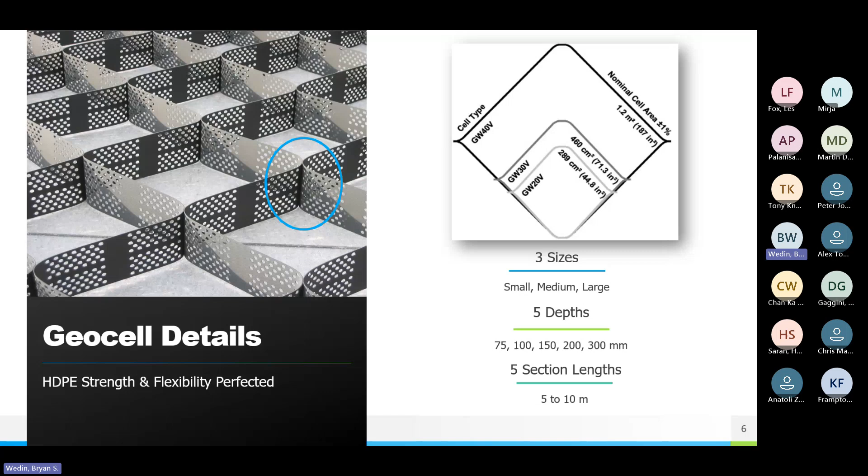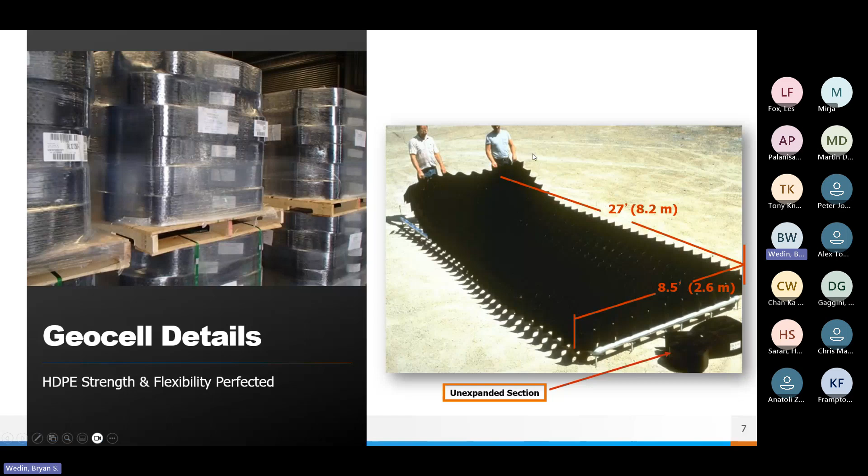Depending on the size and strength, it comes tri-folded on a pallet, ships very efficiently, usually anywhere from 12 to 20 sections on a pallet. Each panel has an area of about 230 square feet, so about 21 square meters. A nominal width of 2.6 meters for all our panels, and variable section lengths, anywhere from 5 to 10 meters in length.

The second characteristic is how you fill it. Geocells are very versatile in what we can fill them with. Under rail applications, usually we're going to use a ballast rock, anything less than about 1.5 inches in diameter can be filled. But a lot of rail projects we do in the UK actually use coarse sand. I'll show you some case studies where our infill was just 100% sand. With good aggregates being harder to find no matter where we do projects around the world, sand is usually locally available and less expensive.

When we do slope projects, hopefully I'll have time to talk about that today. We can fill it with topsoil, aggregates, or concrete. So it really is a very efficient system.

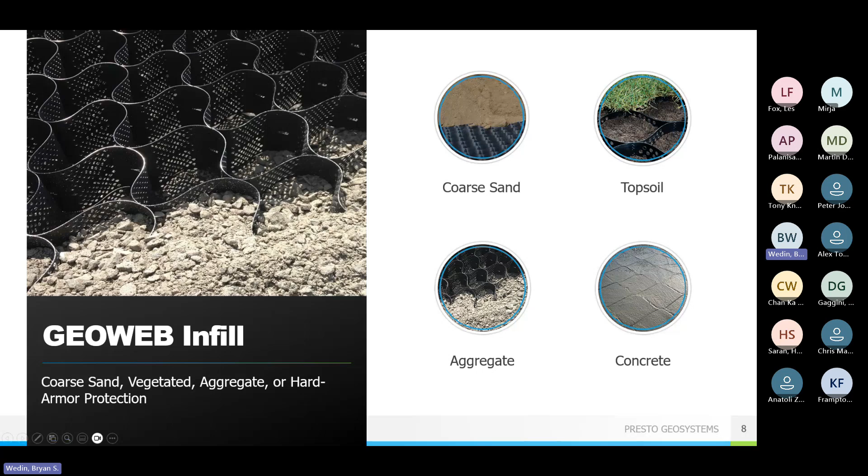The purpose is really just to stabilize and prevent the movement of unstable soils, whether vertically or horizontally. Today I'm focusing on load support, but we do a lot of slope protection for rail, up to about 70 degrees. You can fill it with topsoil, aggregate, or even concrete. We also do a lot of channel protection, and retaining walls — a lot of abutment walls against track all over the world.

So here's how 3D confinement works. Basically you have a vertical cyclical load, whether that's a tire or a train wheel on a track, putting vertical stress down into the subgrade. What we want to do is convert that vertical load to a horizontal load. You've got the active earth pressure inside of the cell pushing out, and the passive earth pressure in the adjacent cell pushing back. So really you only need one or two cells to support that load.

What it does is spread out that load distribution — I'll show you on the next slide. As this vertical load is turned into more of a horizontal load, it engages the hoop stress on the cells, which really does support that load.

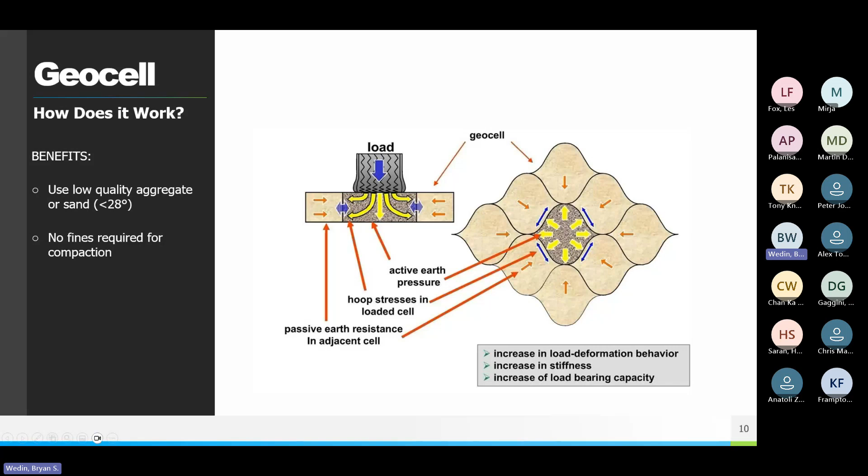This slide shows the amount of stress reduction we can get. A typical load distribution is a 45-degree angle as the load dissipates into the subgrade — you can see the high stresses in red, orange, and yellow. With geocell, stress reduction really reduces all of these high stresses, spreading the load out to 60+ degrees — we call that the mattress effect. By converting vertical load to horizontal load, you widen that stress chart out. As a rule of thumb, in a load support application, whether rail or roadway, we reduce the stress reaching the subgrade by at least 50%. It's a pretty significant stress reduction.

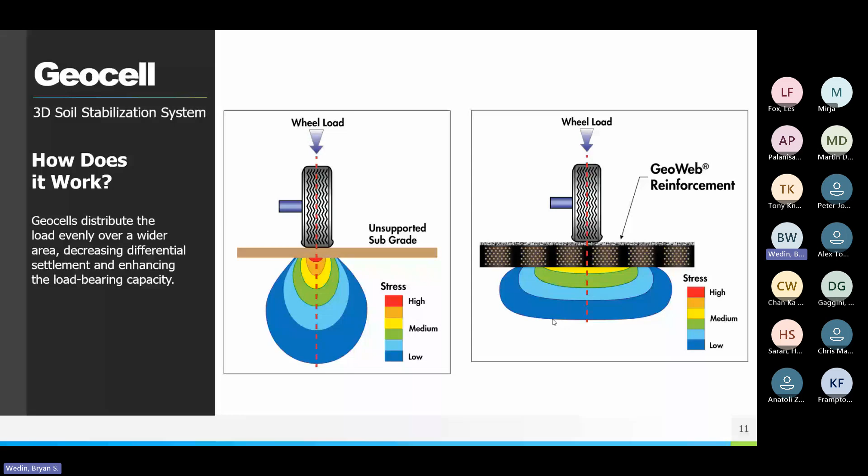We do a specific calculation, site-specific for all of our projects, and we provide charts that show the stress reduction given throughout the cross section.

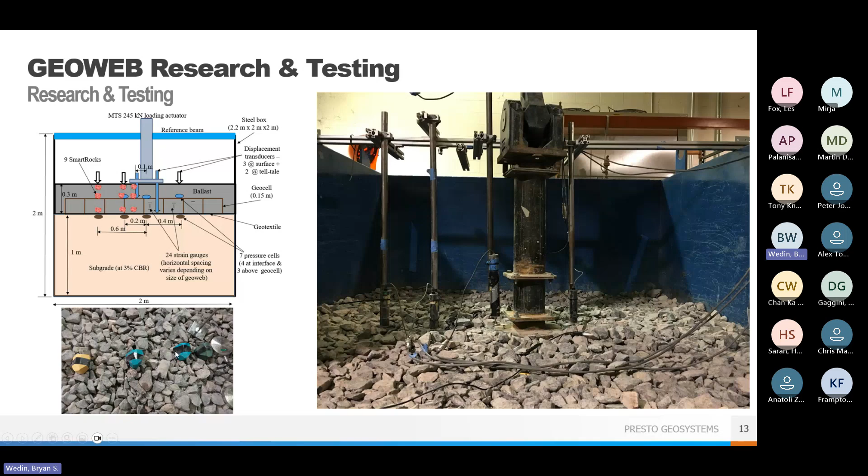I'd like to go over some recent research we did on geocells. We've been producing and selling them for over 40 years, and there have been hundreds and hundreds of research papers done. We've probably done at least 50 tests on GeoWeb — this one was basically under track. We wanted to take advantage of recent FEM, finite element models, for high stress, and we also wanted to use smart rocks — basic vibration sensors that detect how the ballast moves underneath a cyclical load.

We conducted the research here in the States. Jie Han, if anybody has done any unpaved roads or been to any conferences, is a very well-respected technical expert — they created the Giroud-Han unpaved road calculation, so I'm sure a lot of people know of them. Ben Leshchinsky did his PhD thesis on geocells at Oregon State, and Hai Huang from Penn State University provided the smart rock sensors.

Sorry, my laptop just got locked up here. Sorry about that.

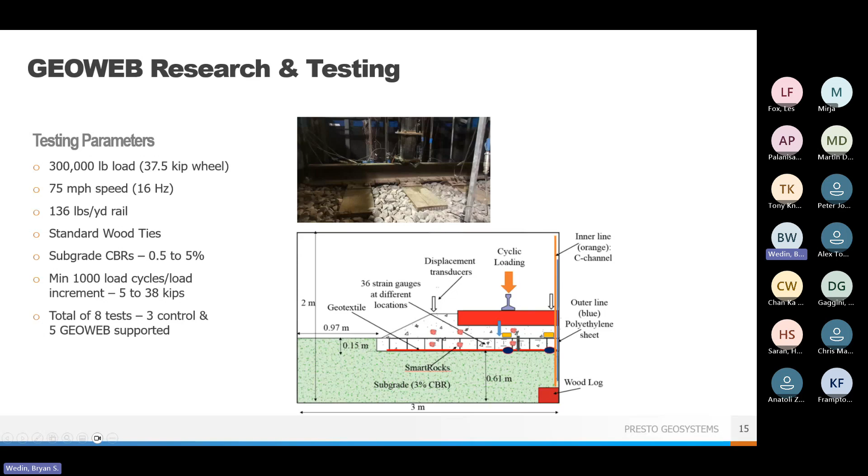We added these smart rock sensors into the GeoWeb. We wanted to see how the stress affects the movement of the rock, whether that's rotationally or in the XY plane. We put it in the GeoWeb, but also halfway between the top of the cell and the bottom of the tie.

A lot of Class 1 railroads and even railroads around the world have used geocells, and they understand how the addition of geocells to support ballast really reduces attrition in the breaking down of particles. It eliminates a lot of maintenance and less tamping.

So one of the main points of this study was to determine what happens when you add a geocell to the ballast. Here you can see how the smart rocks measure it - this one is measuring the ballast rotation, which was one of the points of adding the smart rocks.

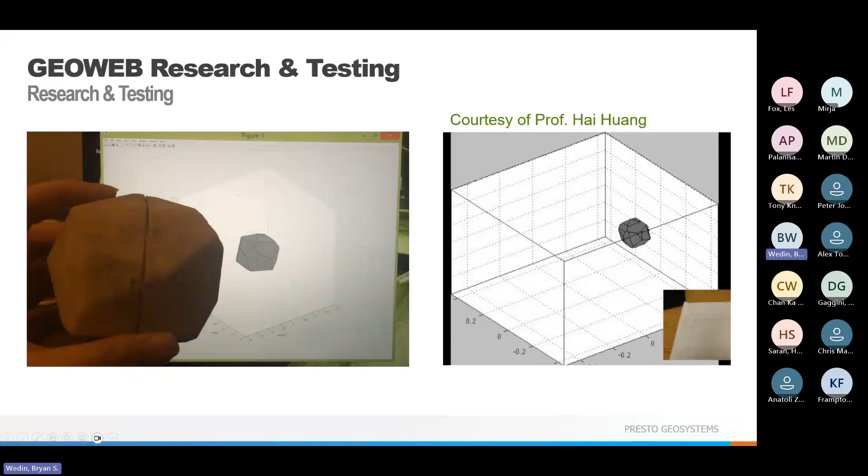The other measurement is basically how it moves around. As each cyclical load is applied, we want to measure how that ballast particle is moving, whether it's rotating and how it's moving back and forth. This one shows the angular velocity, measured by the rotation - how that ballast particle actually rotates.

Here you can see the control section. This is the most important one, because in the geocell it is confined, so it really isn't going to move that much. But this is below the tie - this was a 10-inch ballast, so 5 inches below the tie and 5 inches above the top of the geocell.

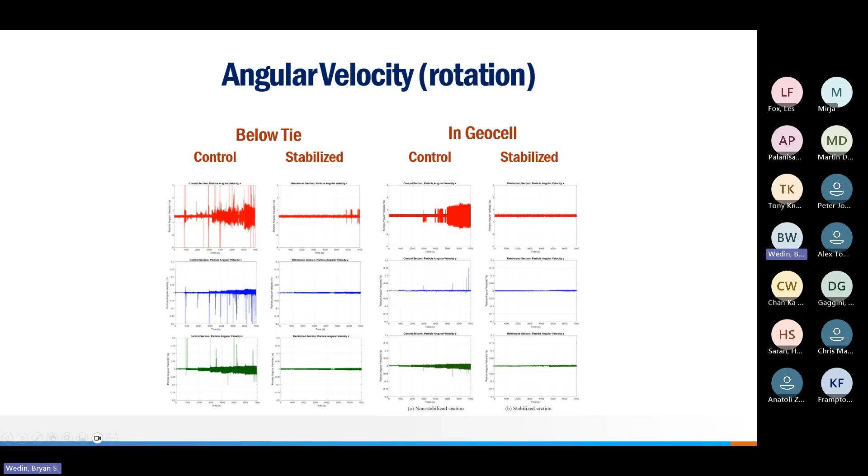Here you can see without any geocell confinement, a significant amount of ballast rotation. But with the geocell, you can see it almost completely eliminates any kind of rotation of that ballast. So you can imagine eliminating that rotation is going to limit the amount of ballast attrition and any kind of tamping.

Here's the second one - we're looking at how it moves back and forth, and once again, in the geocell it's pretty stable. Below the tie again, 5 inches below the bottom of the tie and 5 inches above the cell, you can see the control section has significant movement of that ballast particle, but with the geocell stabilizing it, it almost eliminates any type of movement.

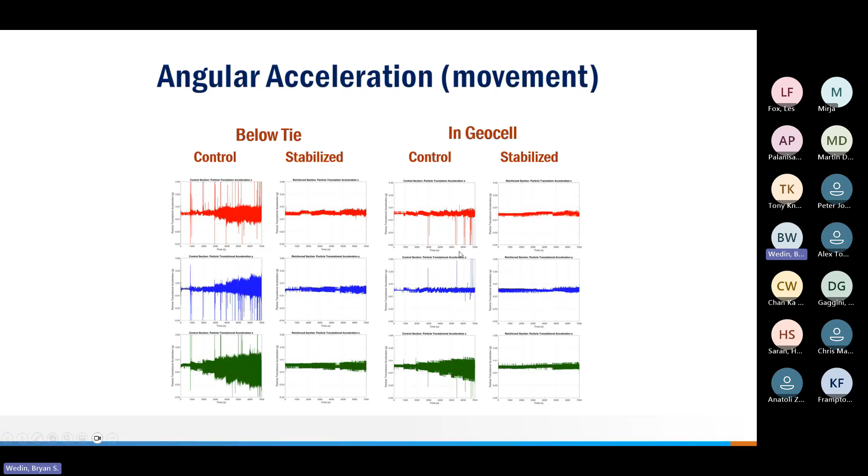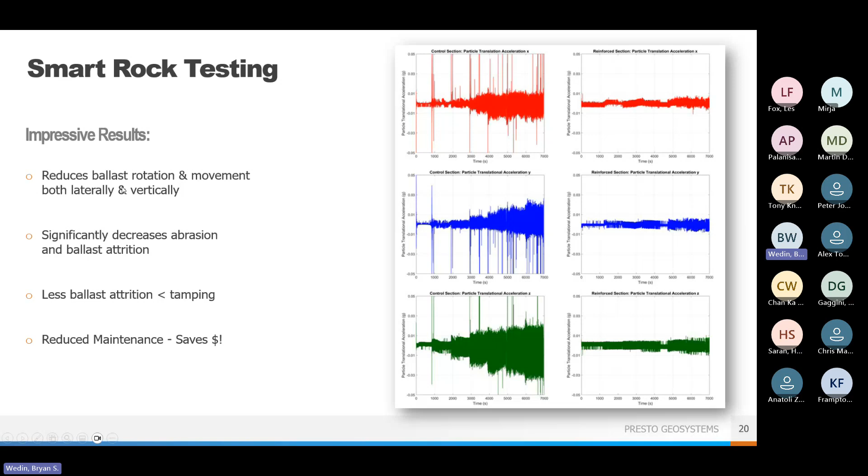It's a pretty significant study we did to show how and why geocells really limit the amount of maintenance required, by reducing ballast rotation and movement. So less attrition means less tamping, saving costs and delaying your maintenance cycles. We also looked at the finite element analysis.

It's proved something we've known for a long time - that we can really decrease the subgrade pressure by at least 50%. We can actually tell you site-specifically what your pressure will be on your subgrade. By reducing that pressure reaching the subgrade, we're also going to control consolidation settlement.

Another thing is differential settlement. If you're putting in a new track, the worst thing that can happen in any type of installation is differential settlement, so you're going to have a lot of bumps in the track. By using the geocell, it really does almost eliminate any kind of differential settlement due to the spreading out of that load - it can control and reduce that kind of settlement.

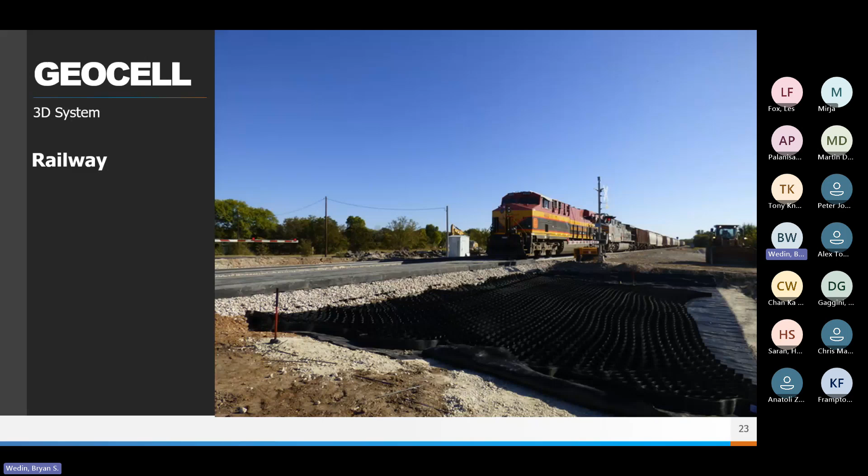Now we're going to talk about some geocell installations on track. Pretty much anywhere you have track, we can add geocells. The biggest advantage really is going to be on some of those high stress areas, whether it's straight track, frogs, turnouts, crossings, bridge abutments, things like that. But we've installed it under track all over the world.

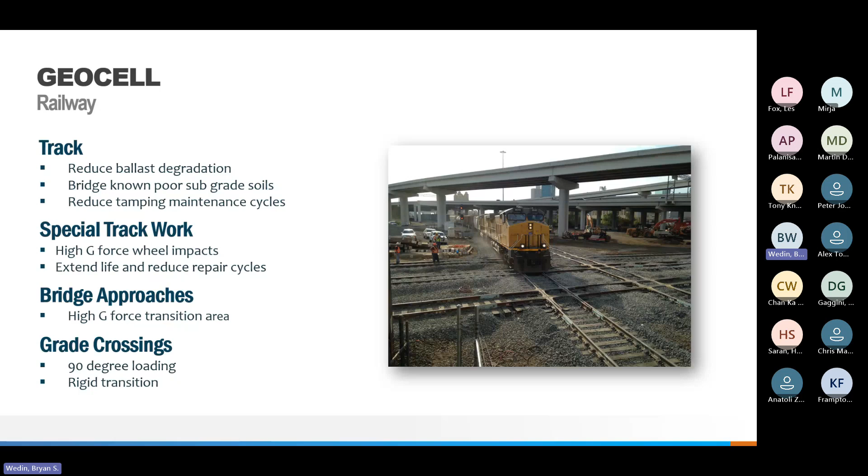We have hundreds and hundreds of case studies and a great website that I'll touch on a little bit later. This is the one that Roy mentioned - this was for British Rail, a couple kilometer section. British Rail had issues with this one because it was in some really bad peat bog areas.

This installation was carried out on the Edinburgh to London line. The area was called Newham Bog, where peat layers reached up to about 5 meters - some pretty bad soils. The primary challenge here was the ground settlement, caused by really bad soil conditions, leading to a lot of track maintenance.

They actually had to reduce the speed from 200 kilometers down to about 70. So you can imagine that increased reduction in speed led to increased travel times and energy consumption. So British Rail really had to do something here.

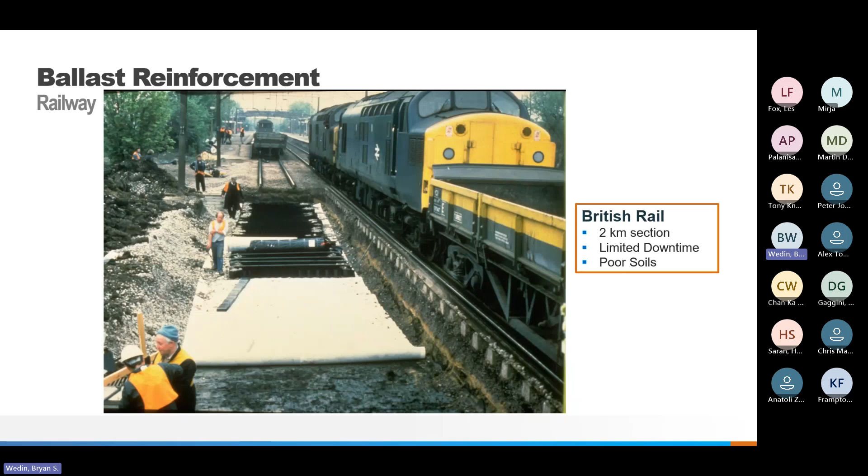The biggest problem here is the downtime. They had to really limit the downtime, and their typical approach of excavating and filling in with rock was not an option. So they came to us and gave us a deadline and time frame to limit those service disruptions.

So here you can see this installation was pretty noteworthy because we did this in two sections. The northbound section was completed first. What they did was expand the sections across, and then they just left the unexpanded sections done, unexpanded, so they could come back. Here you can see they installed actually two layers of geocells.

They were 200 millimeter geocells. Here we installed a drainage geocomposite to enhance drainage across that section.

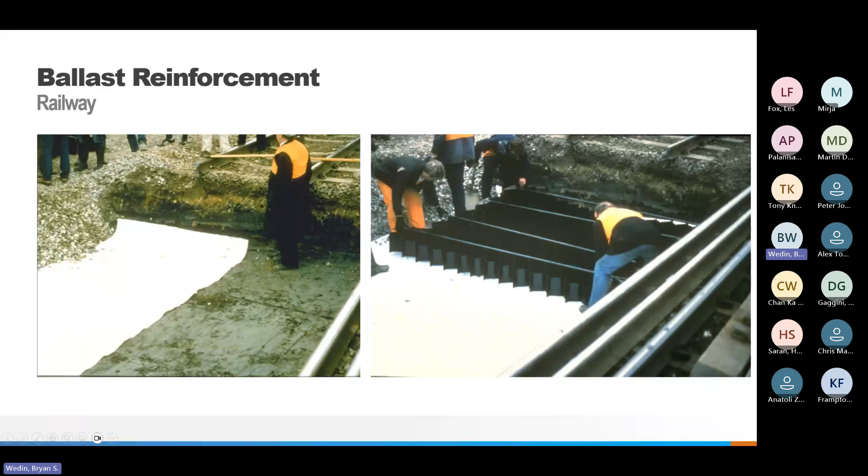This one was so old, I don't know how good the screen is, but this was actually before we added perforations to the geocell. This was one of our original inventions that didn't have any perforations. We added the perforations a couple of years later to increase drainage, but also to increase frictional interlock of the infill material.

Here you can see a better close-up photo of the geocell and the drainage geocomposite in the concrete sleepers and the rail. Here you can see the geocell was filled with crushed aggregate. We really minimized the fines to about 10% to enhance that drainage performance.

Rule of thumb, if you want drainage or enhanced drainage, you want to keep the fines to 10 or 12% or less. It really provides a lot of drainage.

So after we did this improvement, it really did improve the stiffness of the track. Within a couple of weeks of both sides being completed, they were able to restore the speeds from 70 kilometers per hour back up to the target speed of 200 kilometers per hour. So a very efficient installation.

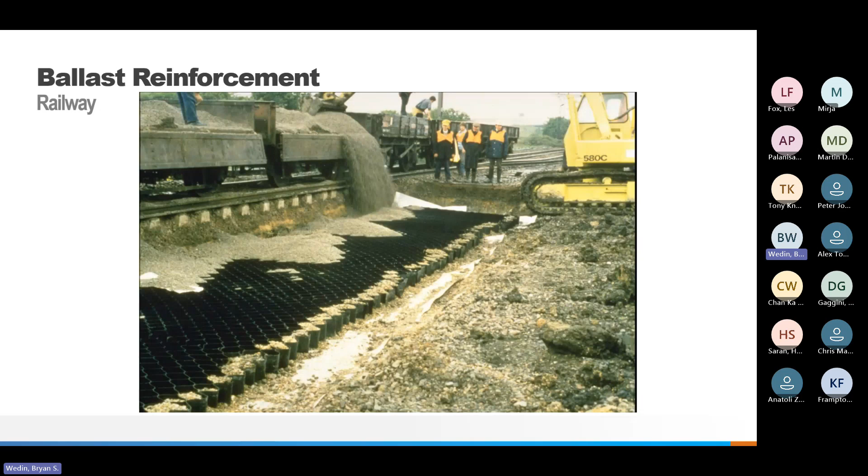Now it's going on almost 30 years, so it's been under the track for a long time. And here you can just see the final track.

This is a project we did for Network Rail. This was a project on our northern hub, called the Bolton Euxton line. Parts of the track here were enhanced on the northern hub, located on some really soft ground, low shear strengths, with CBRs around 1 to 2%.

As a result of that, the standard track depth that was going to be required was as high as 1 meter. Network Rail realized that was basically too expensive to construct. So they contacted us — we've done a lot of work with them.

We worked with their track bed investigation team. They were tasked with finding an alternative design solution. So we worked with them and developed some numerical modeling and also a design method using the way we design track here in the States, the AREMA method.

That's how we design tracks here in the States. I use that method for rail designs all over the world. The one thing I'll show you in a little bit, Roy mentioned about the Network Rail design method that was sent out.

On this project, the model we used, through some testing, looked at different geocell layer thicknesses and different geotextiles compared to their standard track design. The iteration showed that a track bed design consisting of a 250 millimeter ballast layer, 150 millimeter deep geocells filled with granular fill, and about 50 millimeters of sand would provide basically similar performance to a standard design solution from Network Rail, but saved about 100 millimeters of construction depth.

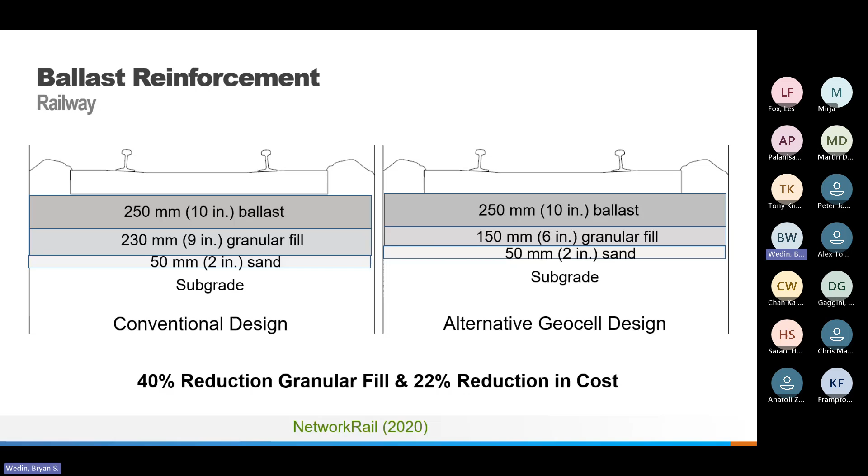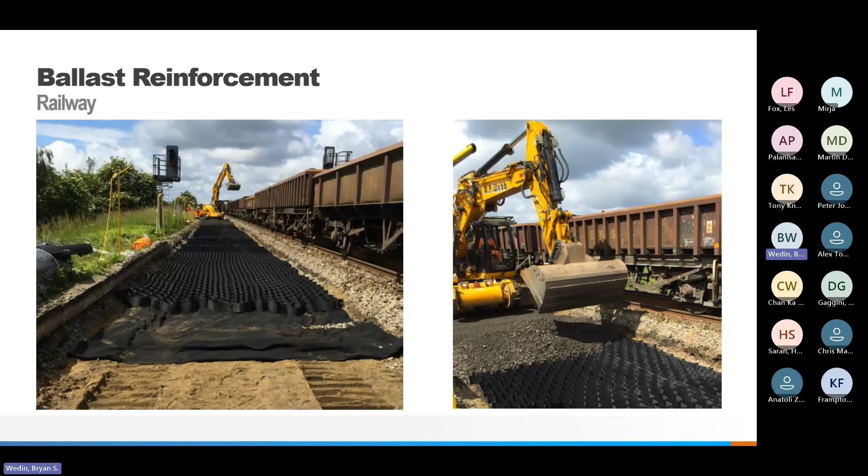Here you can just see a couple of images of the installation. Here a non-woven geotextile was put down, placed with a 50 millimeter sand layer. Once again, that 150 millimeter deep geocell panels were put down, filled with crushed aggregate on this project.

They have been doing routine monitoring of this site since the early 1990s, basically starting in January of 1994.

This line opened in 2018 with the new geocell installation. You can see here the slide shows the track quality of that mile, the worst 35, I mean the standard deviation. You can see it significantly increased and reduced the degradation of that track ballast.

You can see here their first method when they came in and did some reconstruction - this was over excavation and filling in. In 2002, you can see a direct line with how the track performance degraded. They did some stiffening of the ballast back in 2010, and you can see initially a drop, but then right away it got back.

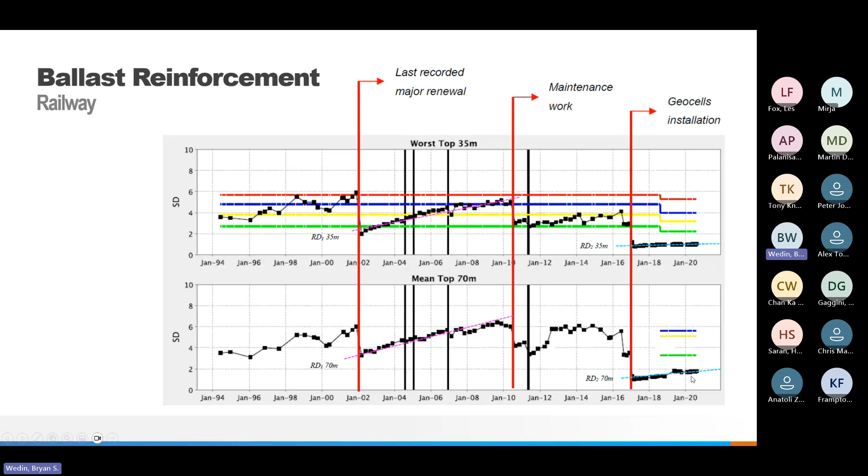When they put in the geocells in '18, you can see very, very low maintenance was required, hardly any degradation over the last 3 to 4 years. So it's been a very successful installation.

Here you can just see a comparison between the track quality in 2002, and after the first installation in late 2017. After the installation in 2017, you can see that track quality and deterioration improved significantly. The deterioration rate after renewal in 2002 ranged to about 0.9 millimeters per year over those 10 to 12 years. After we installed the geocell, those values went from 0.9 millimeters per year down to 0.1 millimeters per year - a significant reduction in the degradation of that ballast.

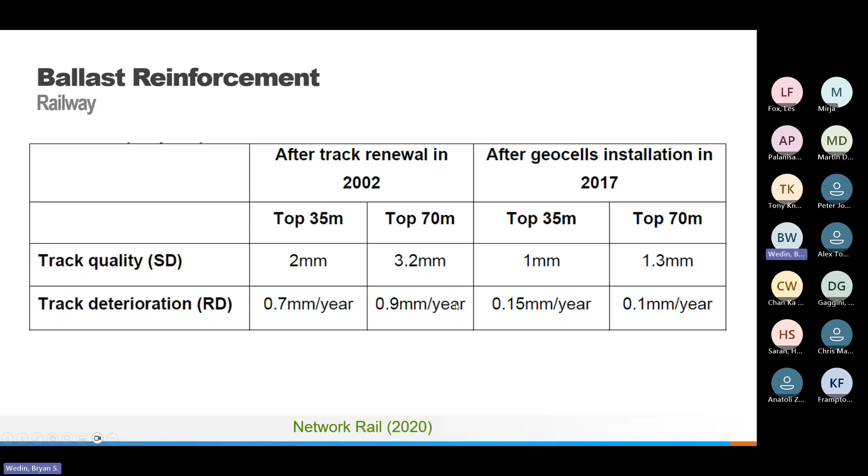Roy had mentioned this before - based on this project and the research and testing we did, and some other projects with Network Rail, they were very interested in expanding the use of geocells under track. So I worked with Network Rail, and they used a lot of our research, specifically the research I talked about with the University of Kansas and Oregon State, to develop this geocell standard. It's available on their website - the use of geocells in the track bed for Network Rail. It was peer reviewed by 6 world-recognized rail professionals all around the world, so it's a very good design guide to use.

So you can use it to develop geocell cross-sections in your designs. Once again, I would highly recommend reaching out to us, and we can help provide a more in-depth evaluation for your track, looking at different factors that lead to deterioration, which I'll show towards the end of the slides. So here's another project.

This was for Werrington, just north of the Peterborough rail station, about 3 miles. The aim of this project was really to increase capacity for passenger trains. This was part of almost a $1 billion upgrade, called the Werrington grade separation project, which built two new track rail lines under tunnels for the existing line. It opened a couple of years ago, and it really did remove the constraints for the timetable caused by slower freight trains that were on that route and had to cross over the line.

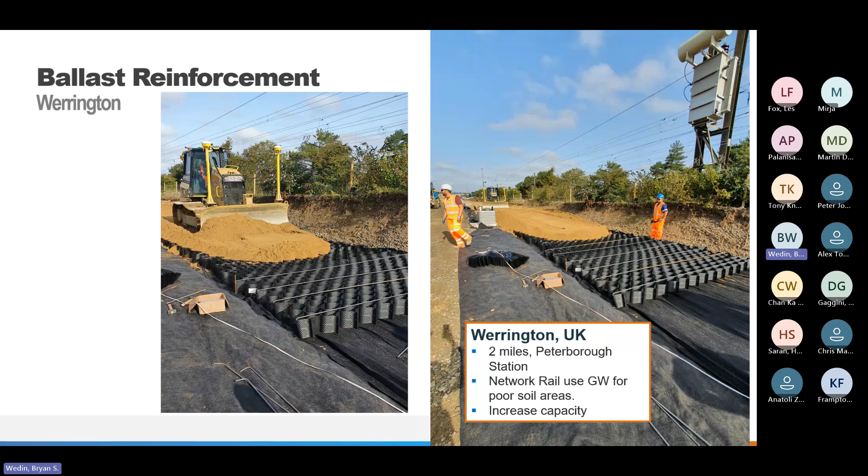So even in Europe now, I know in the States, Australia, South America, they've eliminated any use of slit tape woven geotextiles underneath tracks because of the poor drainage capabilities. So just something to be aware of if you're doing any kind of design - you don't want those geotextiles. But here you can see what I was talking about with that coarse sand.

Aggregates were a little bit more expensive in this area, but they had a ton of coarse sand. So here you can see that we actually use coarse sand to fill the geocell panels. It's really flexible. We can use those low quality sands. We don't need the high friction angle aggregates, like say a geogrid or geotextile, because that geocell really does provide the confinement.

This contractor was very consistent with how we wanted these panels to be expanded. So we actually went out and bought and built these rebar stretcher frames to make sure that track was aligned really straight along that whole couple-mile route.

So you can see installation is very fast, filling it from a side loader on an adjacent track. It goes very fast, especially, this was taken right from the site over in Werrington. As you can see, once they're putting down the fill, typically a dozer with GPS on it just comes and pushes the fill into the cells.

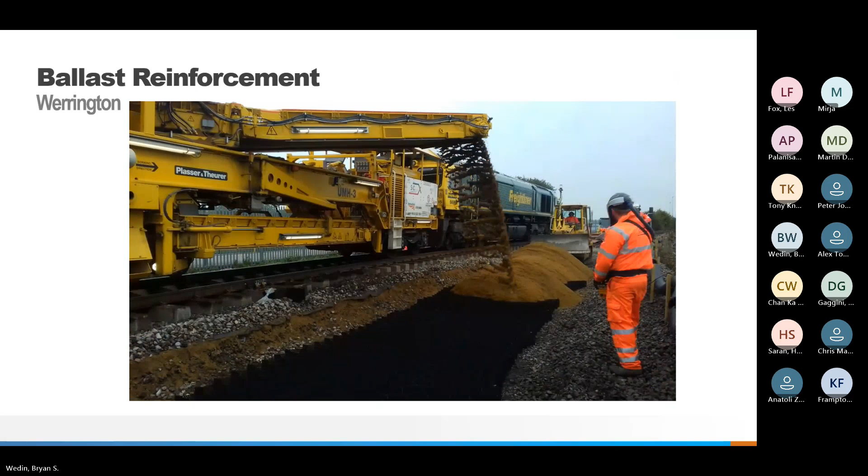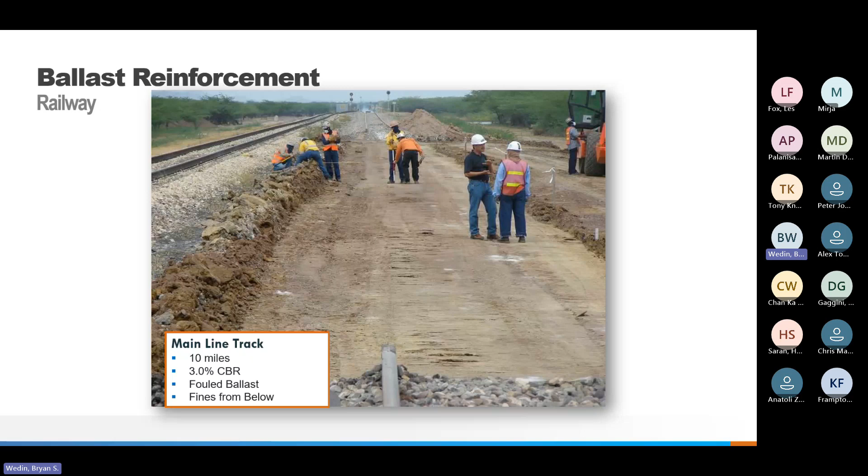Subgrade wasn't too bad, it was about a 2 to 3% CBR. But they had some drainage issues, you can imagine, with all the fines clogging that track bed.

So on this project, the interesting thing is we actually scraped the ballast layer, and it was contaminated. We stockpiled it along the whole site. This was about 10 miles in length.

Here you can see it's 2 panels of GeoWeb, so about a little over 5 meters in width, with an enhanced woven geotextile separator. But like I said, with GeoWeb we can use that coarse sand, just wanting to keep the fines to about 15% or less, which we tested a lot of this ballast for.

So we just stockpiled it and they put it right back into the geocell. This was 150 millimeter GeoWeb depth. Reusing that fouled ballast material saved them from excavating it out, hauling it out, and bringing back fresh ballast - saved over 12,000 cubic meters of material.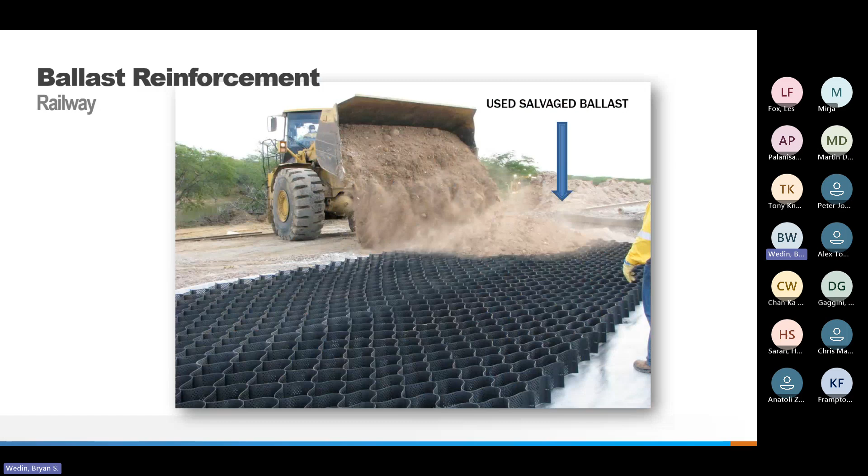So you can imagine the cost savings to the owner, not only in the infill but in hauling costs. Another thing they were sensitive about was carbon emissions. So without having to produce that ballast, haul it, and place it, they saved a lot of carbon emissions. That was really important to the owner too.

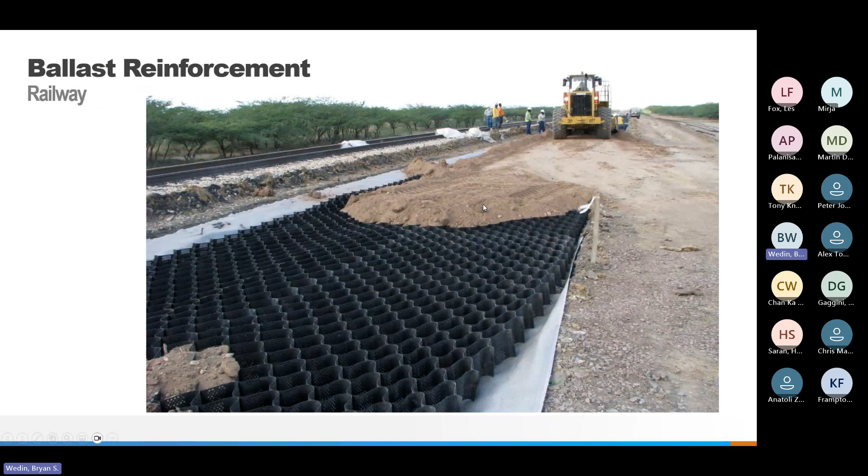Here you can see that salvage ballast being put in. If you look closely, maybe some bigger rocks, they would just go through and basically handpick those out. Here's the finished line, 10 miles, about 12,000 cubic meters. So if you have a rail project, we sometimes can use fouled ballast as the infill material. We would work with you to determine if that's feasible.

Here's one we did. This was in Canada - really, really, really poor subgrade soils. I like to show this one because you can see here a complete degradation of the ballast, all the fines pumped up, and they basically started to lose the ballast into the subgrade.

This is just like that British rail project. You're looking at 5 meters of peat. In Canada it's called muskeg - basically a peat bog.

This one was about 5 miles that we had to repair. This is way up in northern Canada, so there's not very good access to get up there - it's very hard to get up there. We've done a lot of work with the Canadian Rail, Canadian National, Canadian Pacific Rail, so they brought us in to develop a cross section for them.

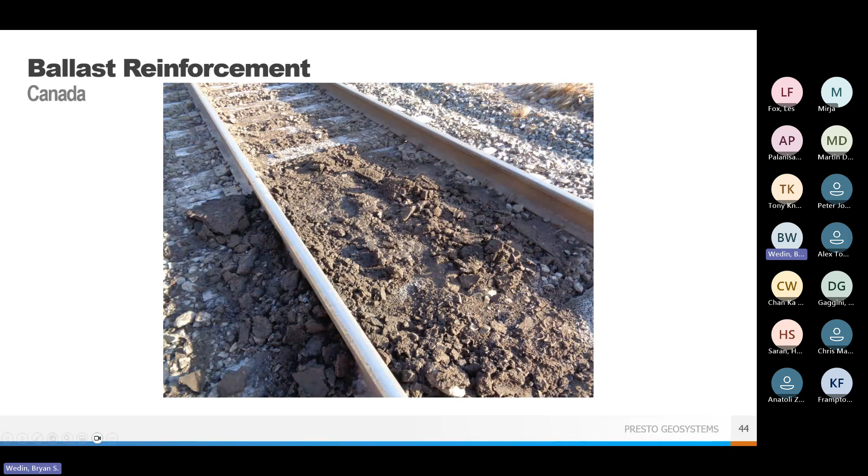Once again, you can see all the pumping of that ballast. And when the trains would go over, I've got a video here - you can see how that track actually depresses and comes back, the squishing and pumping of that ballast. So take a look at this.

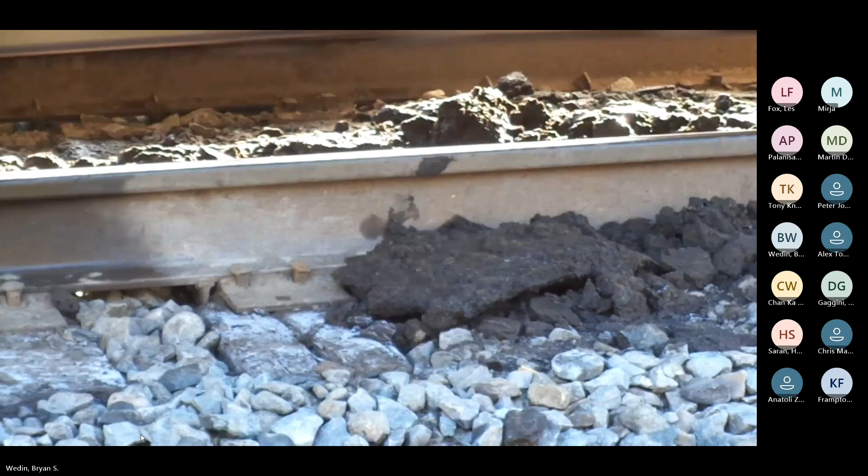So that's the kind of thing you can imagine - every time that train went over, we were able to get really close to the track. As you can imagine, they don't want anybody near the track to take video that close, but to document how bad it was actually moving, they let us get close. Those sleepers were moving, sometimes up to 6 to 7 or 8 inches every time a train went over, and they were extremely worried about the train coming off the tracks, a derailment. So this was really a rush project for them.

Since the subgrade was so poor, we used enhanced woven geotextiles, like I said. It really does allow drainage. Something a lot of engineers aren't aware of is that with a lot of geotextiles on these low subgrade strengths, you've got to overlap them.

Overlapping is pretty consistent for low subgrade soils. Usually there's a guide - there's a European guide, and here in America we use AASHTO, the highway method. It's pretty consistent all over the world, but if you have subgrade CBRs about 1%, this would require a 1 meter overlap. So if anyone's ever been out in the field trying to install a geotextile, if it's windy, it's almost like a kite - very hard to keep that overlap consistent, and really hard to actually install it when it's windy.

So the geotextile manufacturers offer factory seaming. If you have a CBR usually less than 1, it's recommended to factory seam them. On other projects too, you should be aware this is becoming pretty common now - they factory seam these in the factory, so there's no overlap needed. The cost to seam it in the factory is pretty insignificant, and you'll definitely save that in installation time. If you have any information about that, please reach out. I've installed hundreds and hundreds of miles of track with this factory seaming, so it's really something good to look at. And it doesn't have to be a track job - it can be a road job or any type of job.

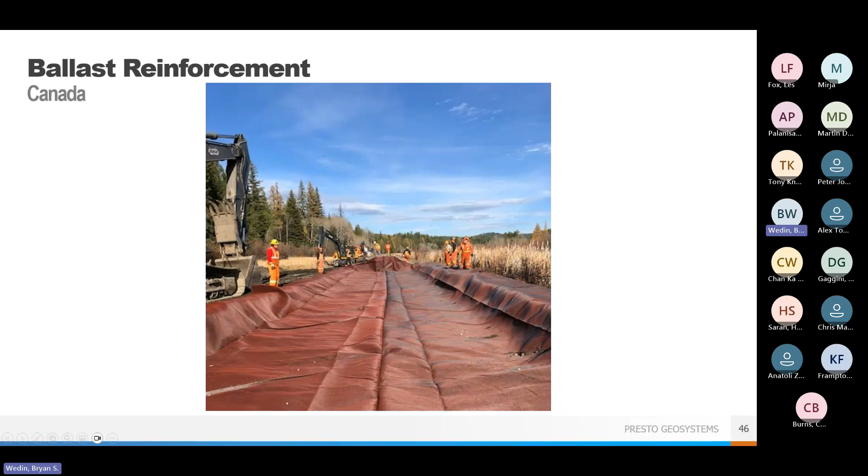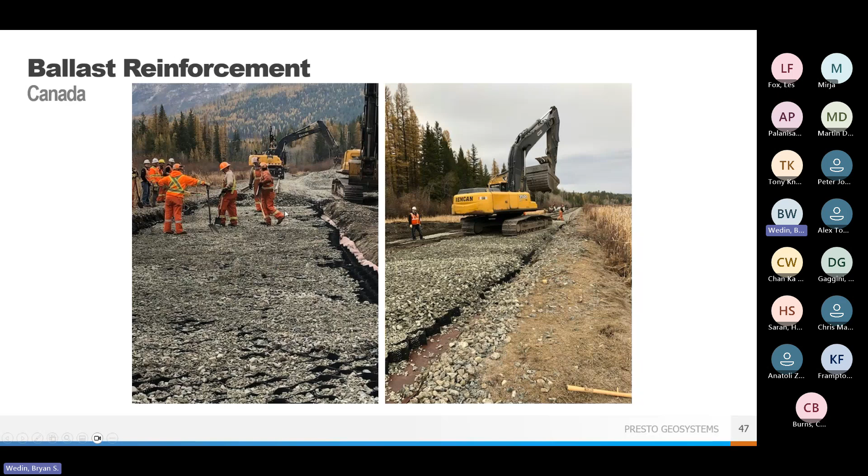Here you can just see a couple of pictures I took, filling in that ballast rock. Like I said, this was way up in northern Canada. Typically here you can see the track being excavated, the geotextile going down and coming up the side. This was filled in with an upgraded aggregate because they wanted really good drainage out the sides of the track layer. Once again, just filled to the top. They did have a compactor on this, but the vibration was really low.

And here you can just see the finished track going into service. Like I said, this is about 5 miles on that northern route.

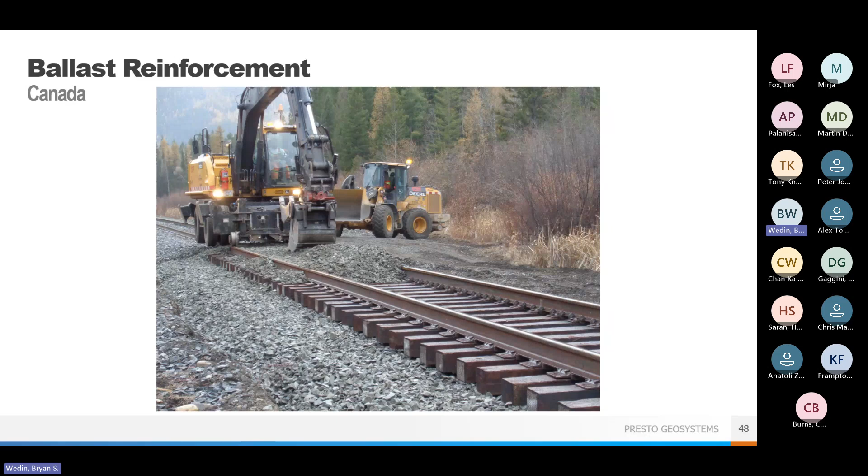We also do a lot of high stress areas - grade crossings, diamonds, frogs, turnouts - a couple of really interesting applications for rail. This is a typical crossing, actually a project we did in the States for one of the big Class 1 railroads. This was an existing crossing that had a lot of maintenance - basically standard concrete panels and wood ties. It's located next to a big concrete plant, so heavy trucks were coming to a stop and accelerating, really damaging that crossing as they went over the top of it. The system failed - the whole concrete panel and the ties failed due to the excessive braking and acceleration going on over it.

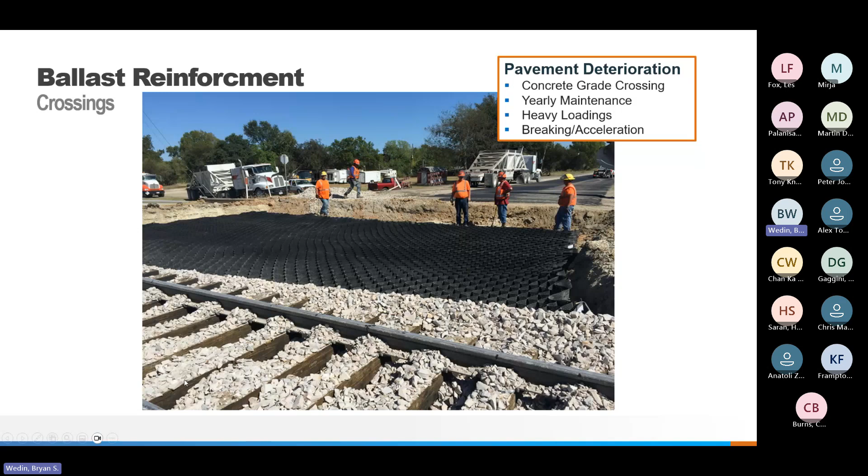So what they did is they tried to relate the panels together, actually tack welded to each other, to try to stop it from failing so much. That didn't work. So they came to us and we put in a standard crossing, going about 8 meters outside of the crossing on each side, to really dissipate that stress as you're coming on and going off it. We wanted to dissipate that stress before it gets to the crossing. This one was pretty interesting.

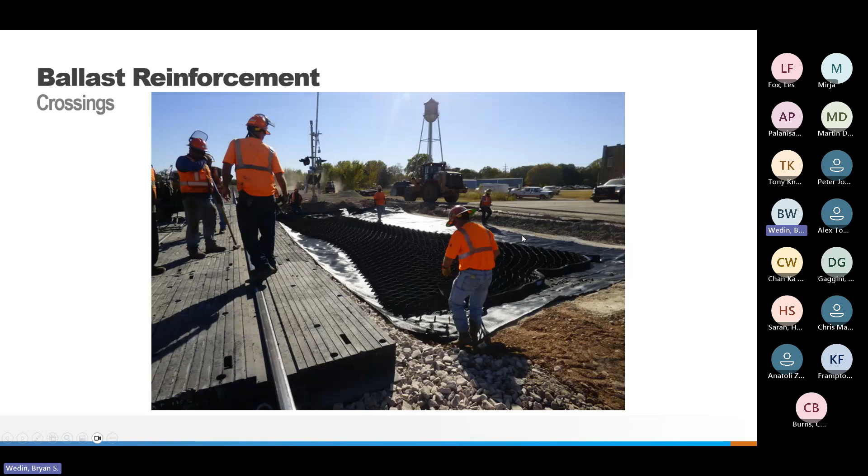This was the first installation of a composite grade crossing. So basically, this is recycled plastic with the steel rail. Here you can see the geo was used underneath the crossing too, and you can see the enhanced geotextile again, and that geoweb being expanded about 8 meters to the other side.

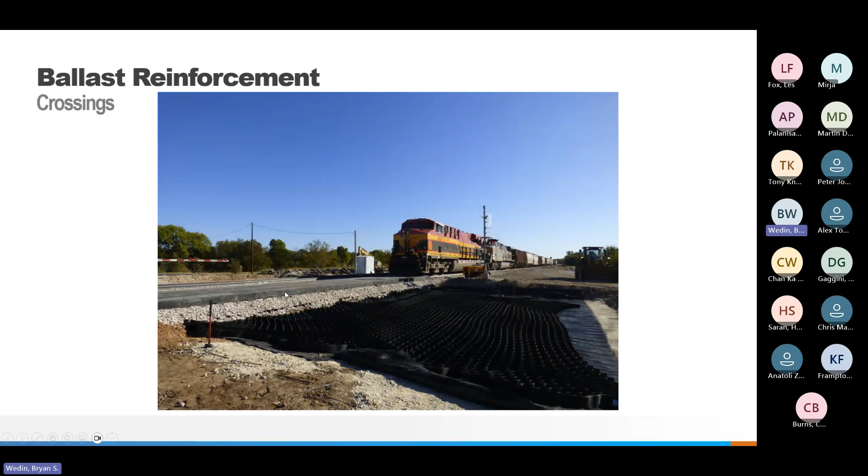And here you can see the first train running through the crossing even before the geo, and it was filled with aggregate. So you can see here underneath the crossing, you can see the geocell, and this one had 12-inch ballast. You can see the great composite grade crossing, a plastic grade crossing.

We do a lot of crossings at night. Geocells are really very quick to install. Most of these crossings might be 1,000 to 2,000 square feet. So a lot of times on Saturday night when the train volume is down and traffic is down, they'll go in, cut the tie or cut the rail, remove the ties, excavate out what they have on there, and once again we're going to stockpile that material and use it to put right back into the crossing.

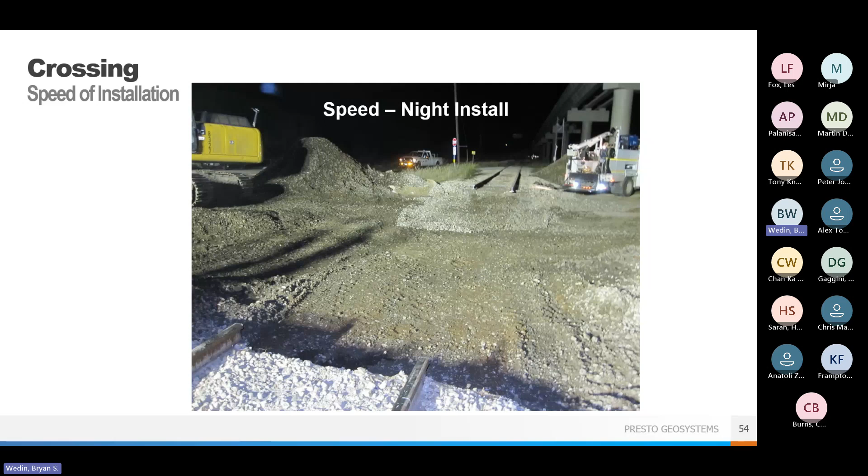Usually these are completed in about 4 to 6 hours. The good thing about it is a lot of times they're conducted by the rail staff itself. They don't have to bring in contractors, so they can really coordinate the traffic and coordinate their own crews to do the work. Like I said, usually Saturday nights, 4 to 6 hours, compared to like an asphalt crossing where the plant has to be open.

But here you can see once again, standard enhanced woven geotextile. This was a 6-inch, 150 millimeter geocell, and we're reusing that salvaged ballast that was removed and put right back in. This one actually was on, and we took these pictures. We started this about 11 o'clock, and they got done putting the rail back in about 4:30 in the morning.

This was the first one that crew did, so really not experienced at all with this track staff, and they did it in around 5 hours. Pretty successful installation. Here you can just see the ties and the rail being installed. So like I said, this is about less than 5 hours.

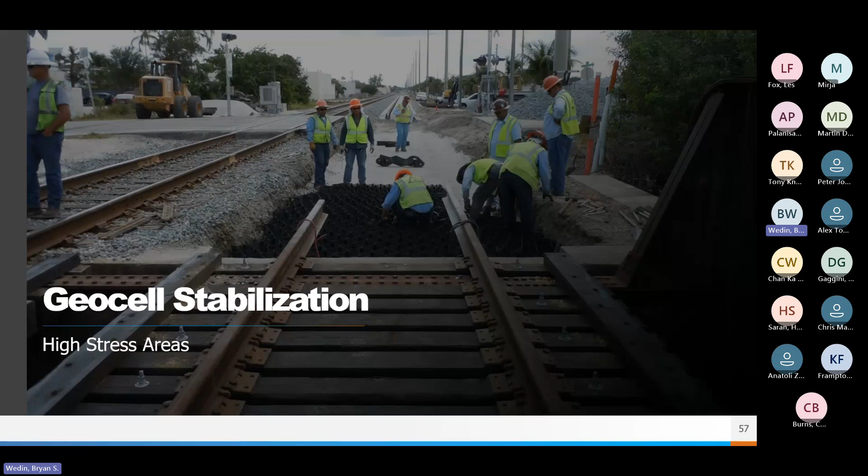We also do a lot of interesting applications. We do a lot of bridge abutments, high stress areas when you're coming off a concrete bridge, and you're dissipating that stress onto the compacted area. Over time, especially when it's a new bridge, depending on the amount of excavation, you're going to get consolidation settlement. That's just going to happen. No contractor could compact it enough where just the weight of the soil and the trains and the rail and the ties above it are going to have some consolidation settlement.

But we've been using this against bridge abutments for almost 30 years now. We've done a lot of work with Australian rail, South America, here in the States, not as much in Europe yet, but also in the UK. Here you can see this is a standard abutment. This one was about 15 feet high.

On this one, we used 2 sections of web, so about 5 meters in length. There is an enhanced woven geotextile under that. Just like the other ones, we want to expand that about 30 feet from the bridge. So here you can see the rail, we stopped the rail about 35 feet. So here's the length, and that basically dissipates that stress going onto the bridge and coming off the bridge.

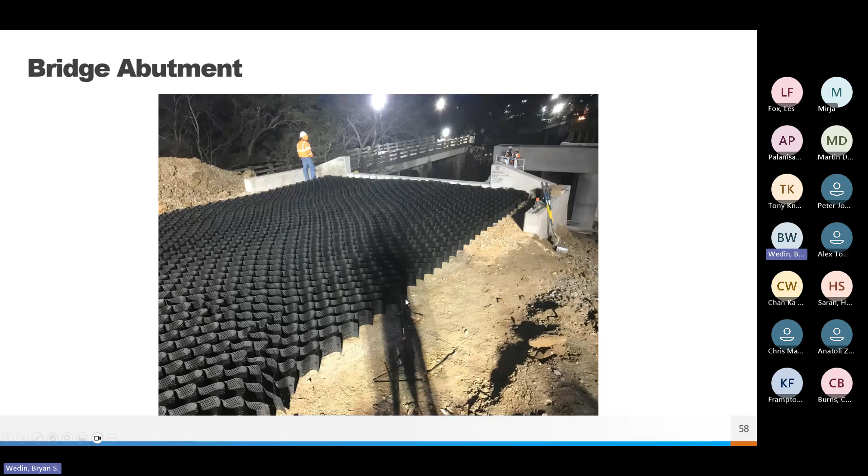Sometimes when we have very deep bridge abutments, I always say about maybe 8 meters, give or take, about 25 feet, a lot of times then we'll put 2 layers of geoweb here at the bridge itself, and then we transition to 1 layer. So this is usually 2 panels in length.

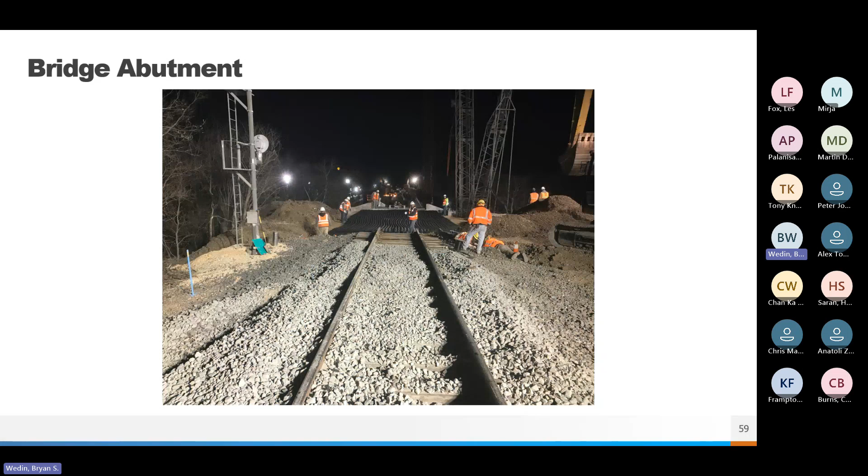So this first area will be double wide panels and 2 panels in depth, then transition to just 1 panel. Like I said, we would work with you, provide full evaluation, so you can see what type of stress reduction that you get at the abutment.

Here's just another project. We do a lot of culvert crossings. Of course, when you have these crossings, these bridges, culverts, you're going to have a significant amount of poor soils, usually wet, poor soils. So we use the GeoWeb here.

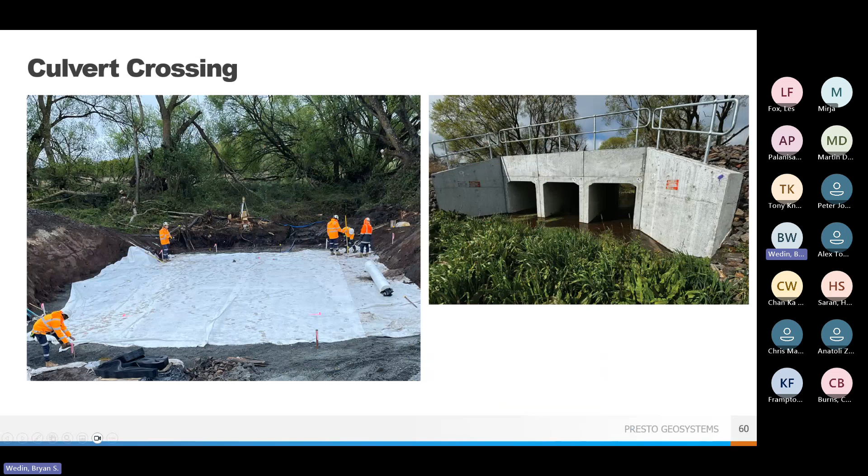Oh, this one is interesting because we actually used a fabric, and we also used... I'll show you the picture. So here we actually used an enhanced woven geotextile underneath the subgrade.

And we actually used a grid, a triaxial geogrid underneath. The rail wanted to ensure that there was absolutely zero settlement, so they wanted to add this geogrid in here too.

So you can see the textile, the geogrid, and the geocell being put down. This was 200 millimeters in depth, filled with the crushed rock. Once again, we limited the fines here, so there would be no issues with drainage on this project.

So in this one, compared to the engineer we worked with on this project, we were able to reduce the thickness of that base by over 50%. This base with the GeoWeb was about 300 millimeters. Without the GeoWeb and just a standard geotextile, they're going to require double that.

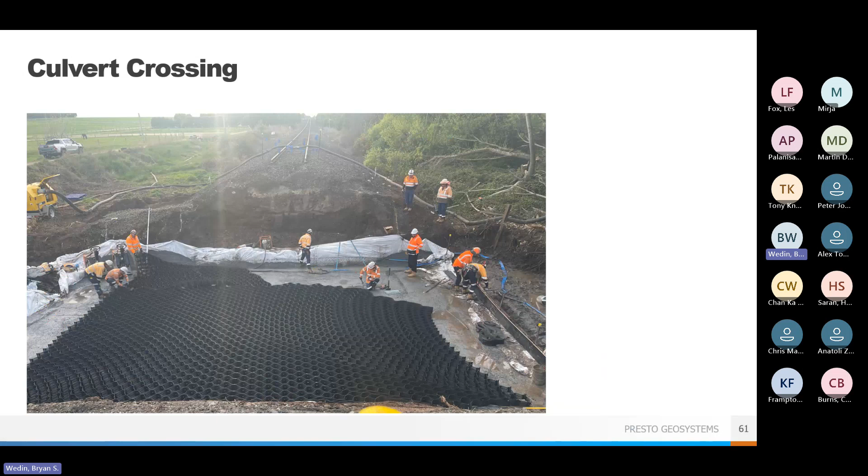So a significant reduction, and the downtime also of rerouting that creek. So now here you can just see the finished project.

Also scales. Scales, if you are using rail scales, they want to see almost zero deflection. A lot of the scale manufacturers will include the geocells right in with their designs. But if you've got a sensitive scale or any kind of scale, you might want to take a look at some reinforcement underneath that scale.

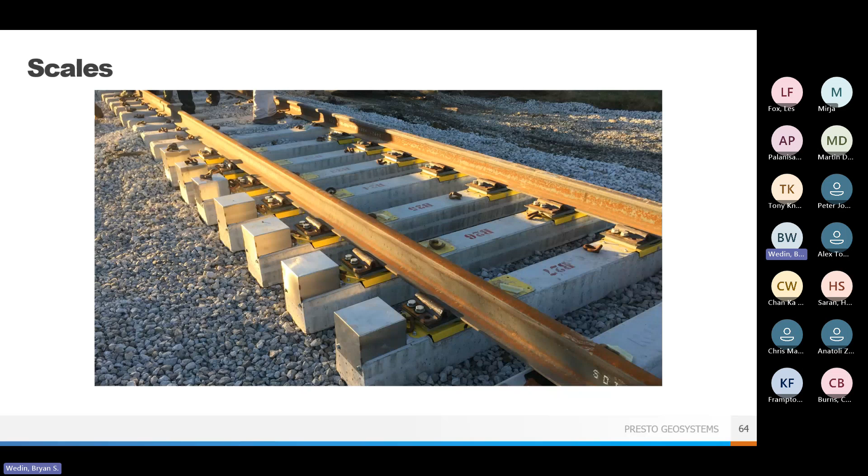So as Roy had mentioned, and I mentioned too, this geocell guide was created back, it's going on 5 years now. That is available through Network Rail. I'm sure Roy can help you out by getting a copy of that and showing you where it is online. But in addition to that, you really should take a little deeper dive.

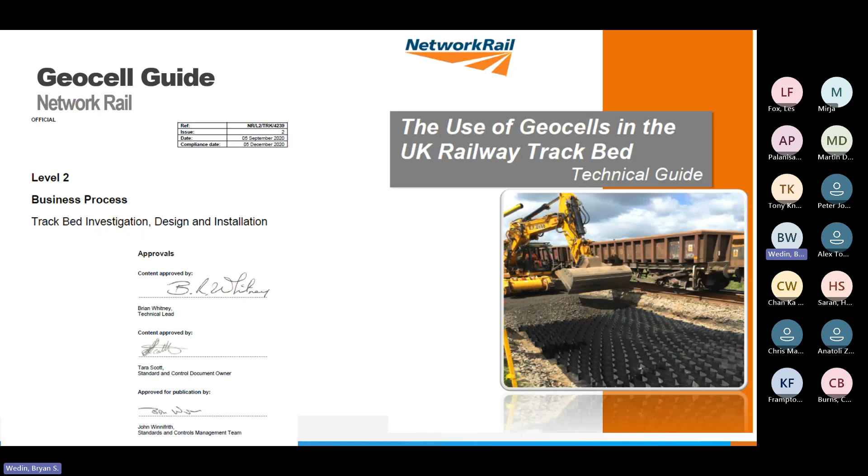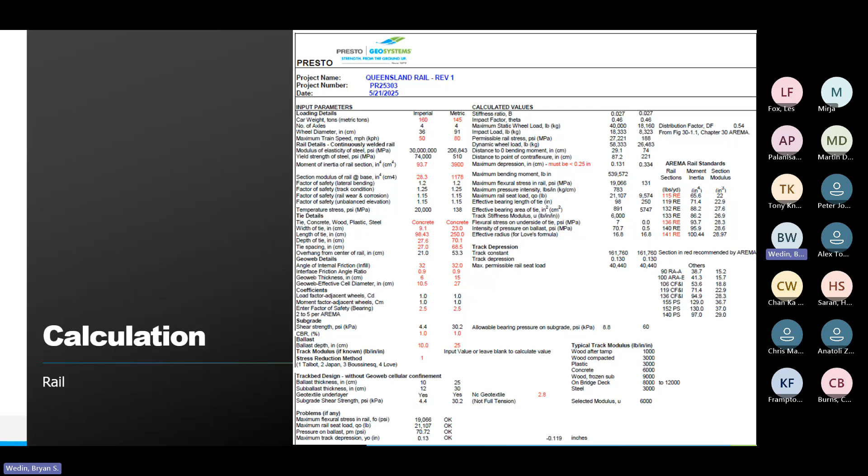This is the method that I put together, and it looks at a bunch of different, not only strength of subgrade and shear stress, but a bunch of different conditions that you may run into with rail. So there's a lot of input parameters here.

There's basically everything in the red I put in: the car weight, the diameter of the wheel, the moment of inertia, and the modulus of the rail itself. So here, depending on the pound per yard rail you're using, I'll get the inertia and the modulus.

The type of sleeper that it is, whether it's concrete, plastic, steel, wood, and then all the dimensions, whether the spacing and the length of the tie, some GeoWeb information, the effective diameter. So this is a 30V.

I'd mentioned it comes in 3. I think I lost it for a second there. But then some geocell parameters, and also we entered a factor of safety, and then it's a subgrade CBR.

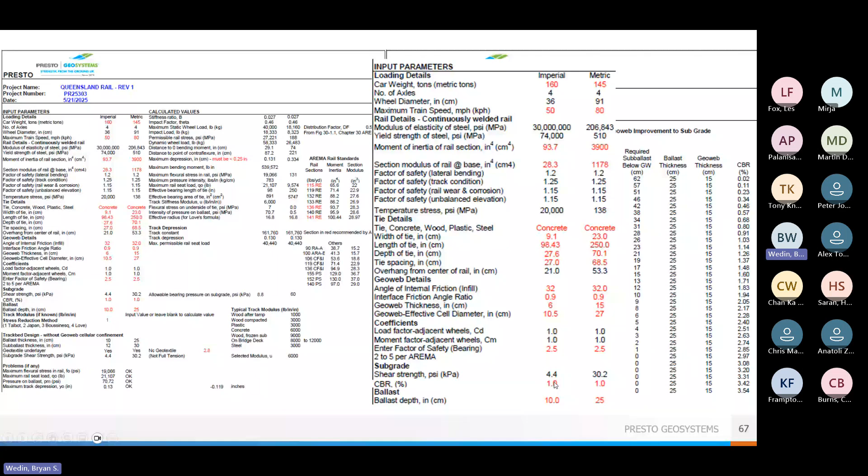So out of that, we're checking a bunch of different things, not only subgrade stiffness and what we look at, but we're also looking at the flexural stress in the rail. We want to make sure that doesn't exceed the permissible stress.

We're also looking at the seat load to make sure that the seat load is not overstressed. And we're also looking at the pressure on the ballast, from the train going across it. A good rule of thumb is we want to keep that ballast pressure below about 85 psi.

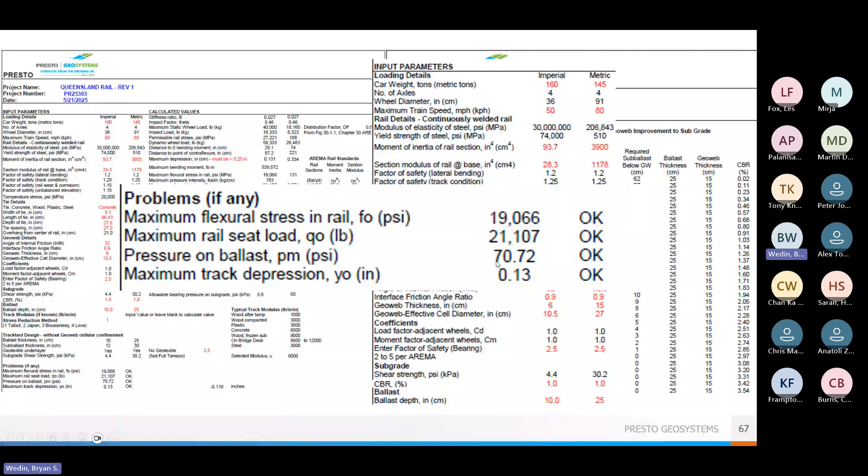Sorry if I have it in imperial, but anywhere from 65 to 85 psi. So you don't want to overstress that ballast. We do a lot of designs, and I know on a lot of projects you might not have the money or the time to do a full-scale geotechnical report or to do some DCP tests.

So if you're interested, you can use these on any type of project, whether it's using or not using geocells. This is a really good thing to have in your toolbox if you're on a project.

So in summary, we can add these to any type of rail project. It really is a flexible design.

The variable infill we can use for track beds can be coarse sand, recycled ballast, or clean ballast—very, very flexible on what can be put into it.

By decreasing that stress on the subgrade, you're really going to control the differential settlement, almost eliminate it basically, and also control the consolidation settlement. You are going to for sure decrease your subballast thickness if you're on poor subgrades. Through that research and testing with the smart rocks, you're almost eliminating any type of ballast rotation and movement, which has a direct correlation to maintenance costs and maintenance time.

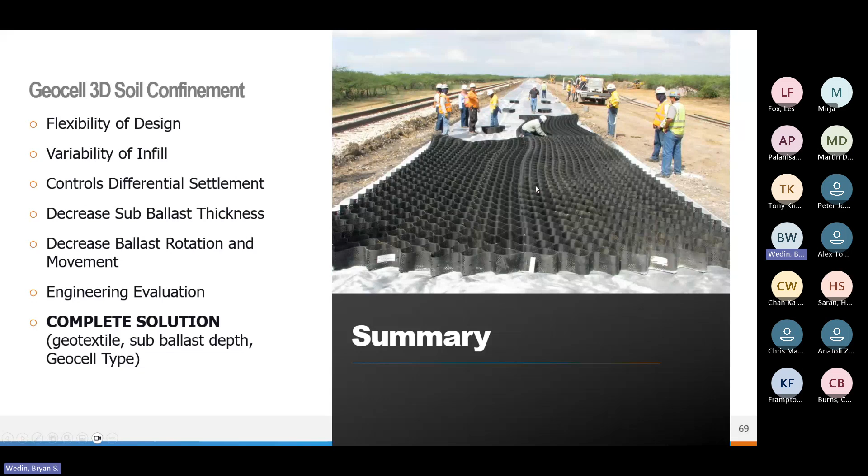Please require a full evaluation for each of your projects based on site-specific characteristics. We provide them for free. Don't use any standard tables and graphs because each site is going to be different. So highly recommend, no matter if it's a 20-meter section of track or 100 miles of track, we actually provide the same service. Please make sure that you get that from the manufacturer.

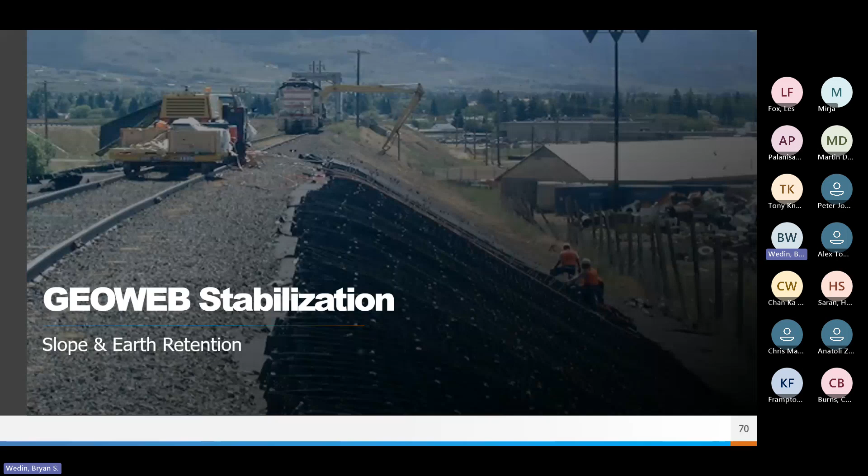So just a couple slides on slope retention and walls. Once again, it's very flexible. We do a lot of slopes along track—aggregate, vegetated, or concrete.

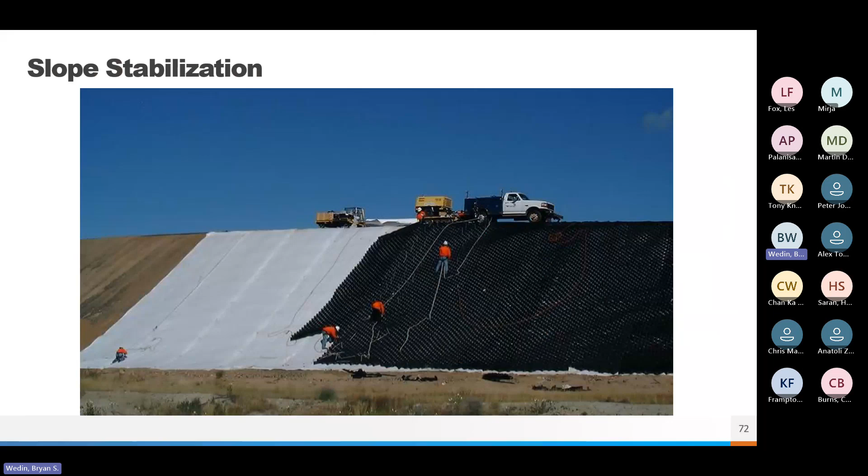Here's just a typical slope project. This was about 20,000 square meters on a couple sides of the track. This owner wanted no animals to get on the track—this area had a lot of deer, a lot of elk, things like that.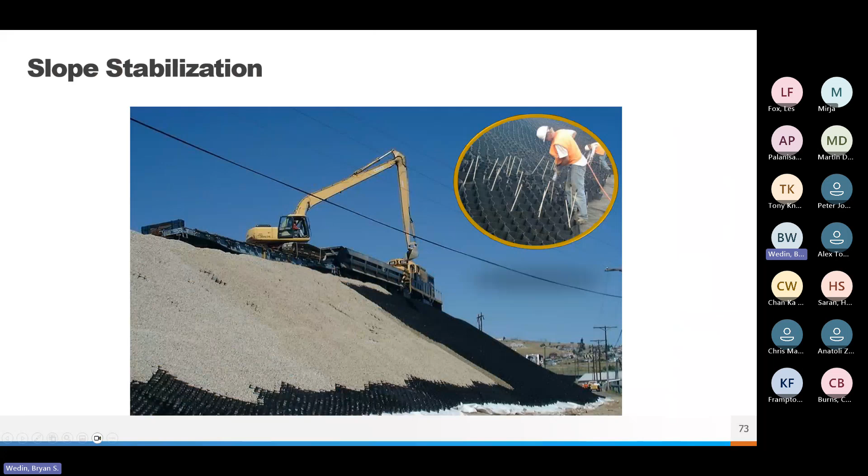So they went with an aggregate solution. All of our applications typically have some type of anchorage, so we'll do an evaluation to make sure these geocells don't slide down from the crest of the slope. You can see we always fill it from the top down, and here you can see filling under the bridge abutment.

Like I said, this was about 20,000 square meters. Here you can see, this picture was taken about 2 or 3 years after. Due to that confinement, it really does prevent any type of attrition in the rock moving down the slope. We've done slopes up to 70 degrees—most of them are vegetated, but it's a very flexible solution for you.

This one here was the track over in Poland we did. Interesting one here, we actually had a wall below it. But here they wanted a vegetated surface because it was going through some residential areas, so they wanted it to look like a rock—something that is vegetated.

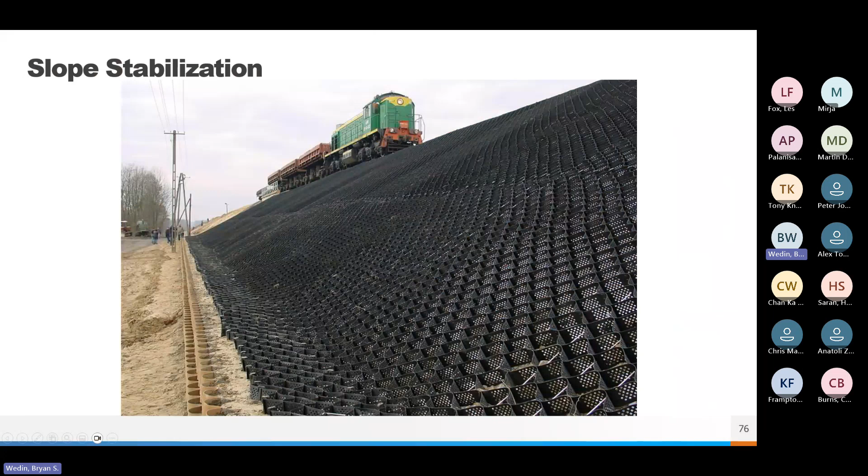Here you can see once again filling from the top down, and once again here we designed a reinforced wall structure below it, to get that slope angle a little bit less.

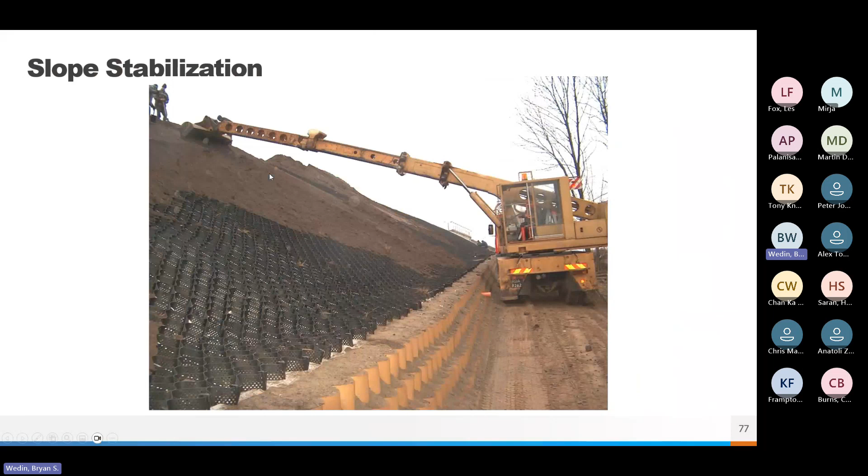Just a note, when you're doing a geocell solution against this—this is a track here, the main track in Montreal, their passenger track.

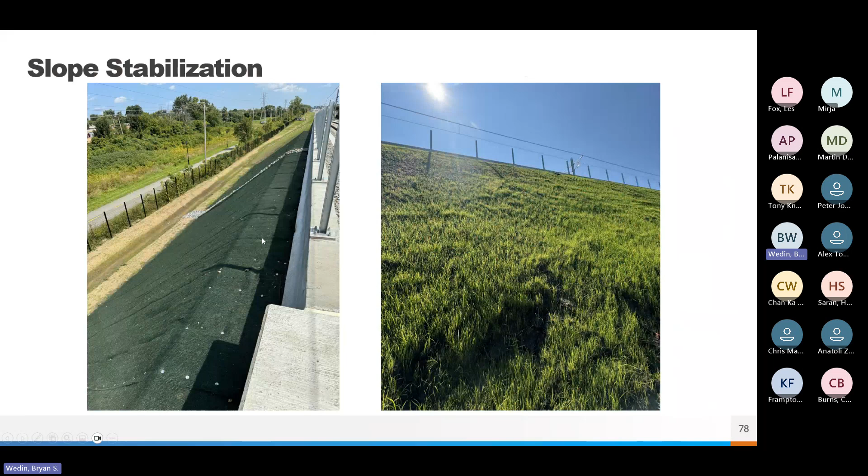Any kind of surface protection, Roy's an expert on that. A lot of times you're putting on an erosion control blanket or a turf reinforcement mat. A lot of tracks we're seeing is hydro seeding. So work with Roy—he can help you with erosion control blankets, turf reinforcement mats, and this is what the system is going to look like once fully vegetated. Very flexible solution, we can help you out with that also.

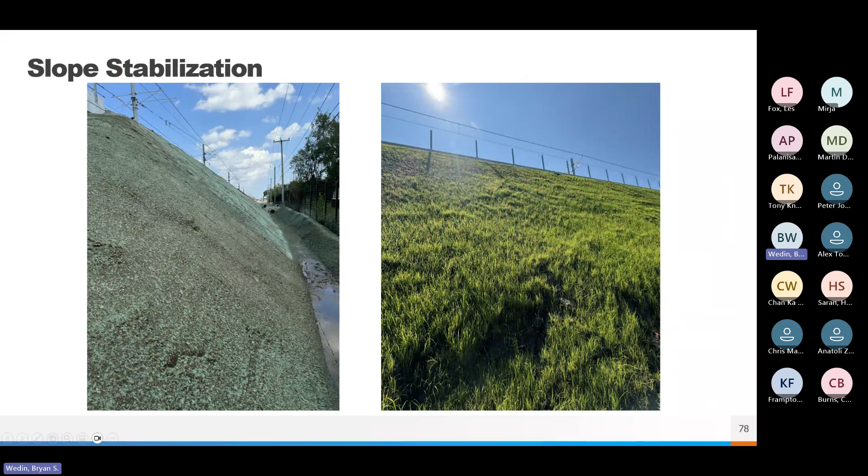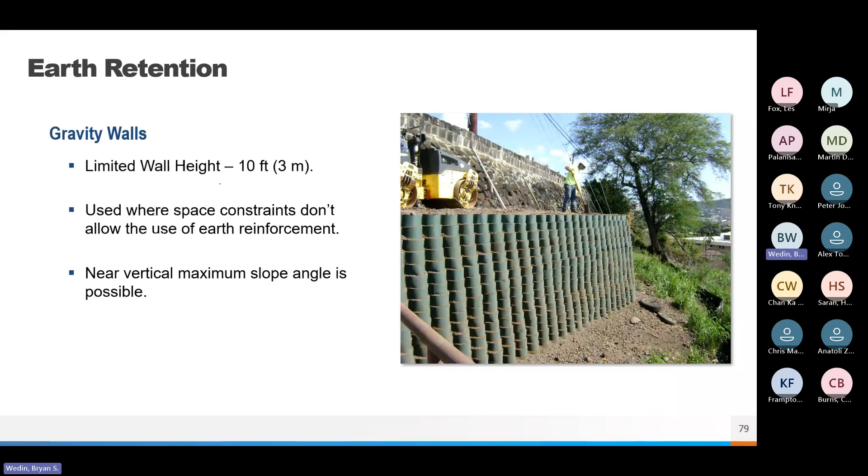Touching a little bit on some walls—we can do gravity walls, typically up to about 3 meters. That really depends on the surcharge load on top. These don't require any type of geogrid reinforcement, so very easy and quick to construct. Here you can see the geocell is plastic, so you can cut around any type of barrier that may be there.

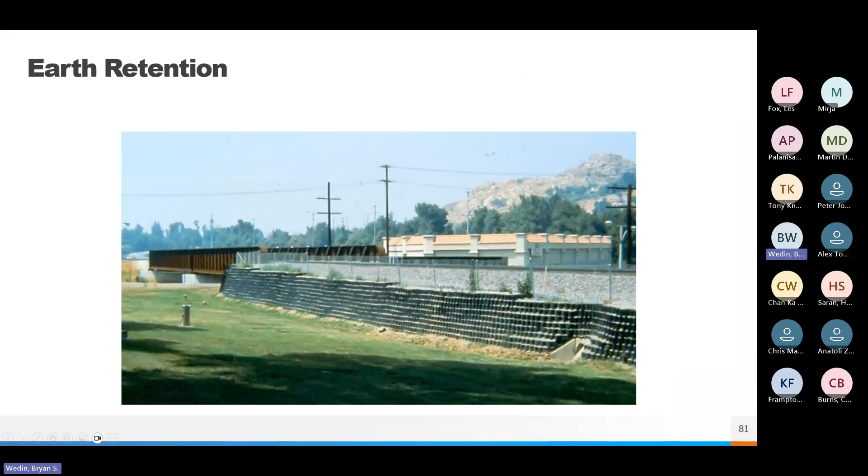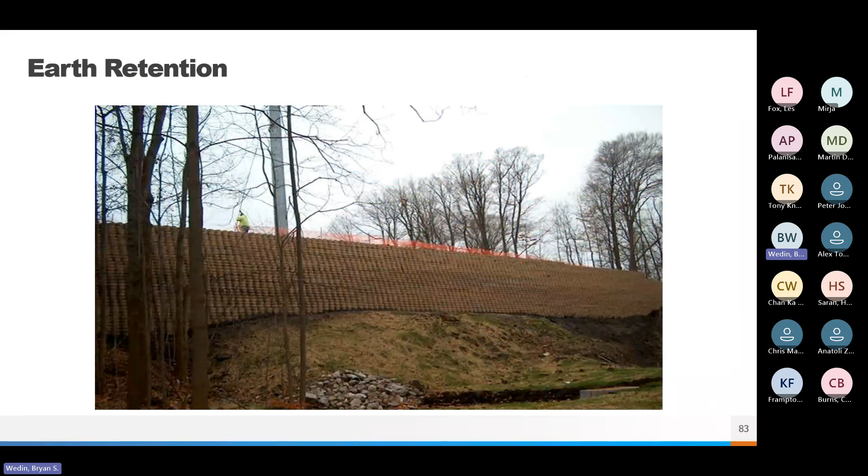So we actually added a GeoWeb wall on the outside here, and the limited easement too. Here's a project, this is what it looks like—a vegetated wall for a track we did not too far from Green Bay, Wisconsin. This was constructed in the fall, so they hydro seeded this area. The following summer I went back, and this is what it looks like after full vegetation.

So basically, most of the walls that we're doing—we do a lot of walls in the UK—they can be vegetated or they can be aggregate.

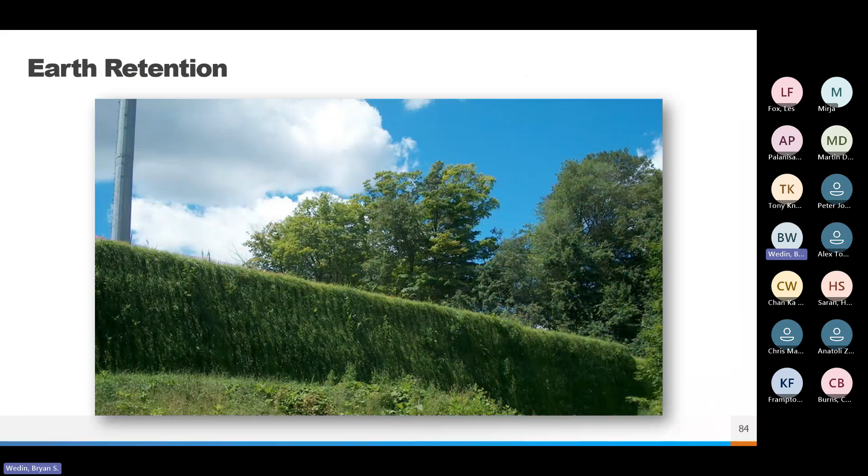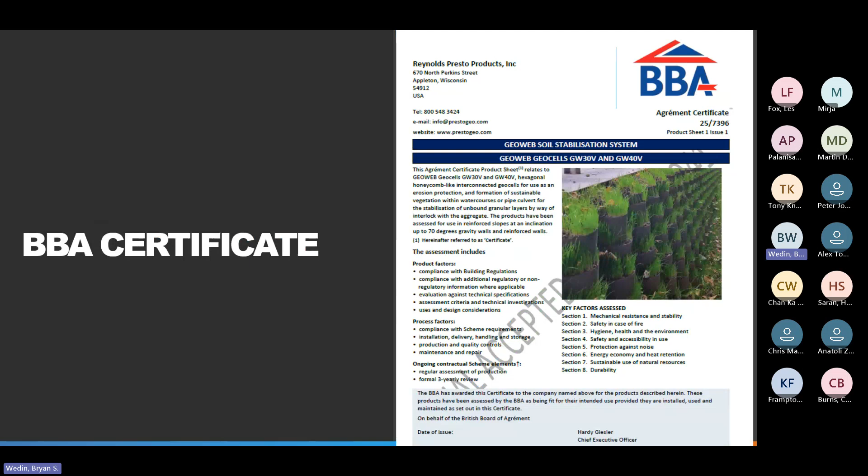I do have a free program if you do any wall designs, called GeoWeb MSE. You can easily design and reinforce gravity walls or even reinforced slopes with the software. If you're interested, let me know or let Roy know, and I can get you a copy. On a final note, we do have BBA certification for GeoWeb in the UK, so if you need any BBA requirements, please reach out to Roy and we can get you a copy of that certificate.

So with that, I know I tried to cover a lot in 50 minutes or so, but I really appreciate everybody taking the time this late in the day to listen to us talk about GeoWeb and geocells. If there's any questions, we can address them now, or here's my phone number and contact information—if you have any questions that come up later, reach out to me and I'd be more than happy to answer them. So with that, Roy, I'll turn it back over.

Yeah, thanks for that, Bryan. I'm Les Fox, by the way, so I'm the chair for the Cheshire and North Wales section PWI here in Crewe, Cheshire. Thanks for that—that's an excellent talk and really interesting. It's particularly interesting for me to see how things are done in the USA. It doesn't look like it's too different to how we do things here in terms of track bed reinforcement, slopes and retaining walls.